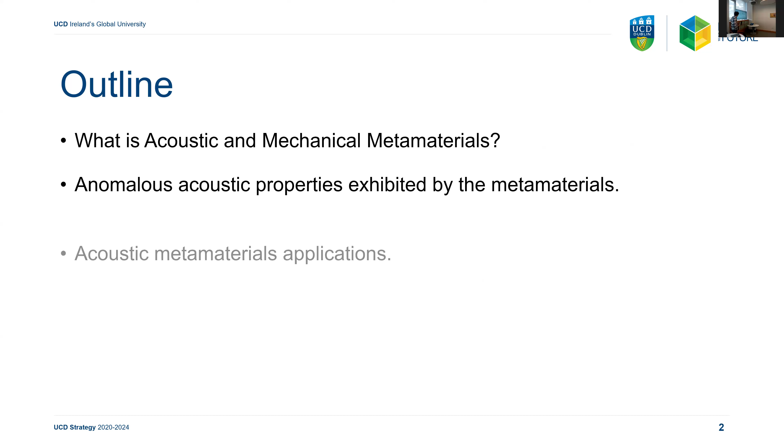I will first talk about what is acoustic metamaterials and mechanical metamaterials very briefly. Then I will tell you more about some of the acoustic and mechanical properties, in less technical terms, that are exhibited by metamaterials. Then acoustic metamaterials applications, mechanical metamaterials, and their application in a wide range of disciplines.

So metamaterials in itself is not a material. These are artificially engineered structures. So we design these structures on a different scale. People in electromagnetic fields are doing it for antenna purposes at nanoscale or micro scale. People in acoustics are doing this at the millimeter scale, micrometer scale, or even meter scale. So in the acoustic metamaterials field, we play with the frequency and the size of the structure. We design these structures in such a way that gives some unusual properties that cannot be observed naturally, that cannot be exhibited by naturally occurring material.

For example, metamaterials give negative permeability and negative permittivity, which is a famous property in the electromagnetic field. According to people working in electrical or electronics departments, it might be a little confusing if you tell them that permittivity and permeability can be a negative number. Generally, it's a positive number.

In acoustics, it can give you negative mass density. It can give you negative bulk modulus. These are some terms which I think you've come across in higher secondary school if you're not from an engineering background. It also gives you a negative Poisson ratio property. Poisson ratio is: if you stretch a material in one direction, in the longitudinal direction, it contracts in the other direction, and this is a natural phenomenon. But if you design your structure in a fascinating way, you can produce a negative Poisson ratio, which means that if you stretch your material in the longitudinal direction, it will expand in the lateral direction. And if you compress it in the longitudinal direction, it will compress in the other direction as well. So these are some unusual properties exhibited by artificially engineered materials. We call them metamaterials.

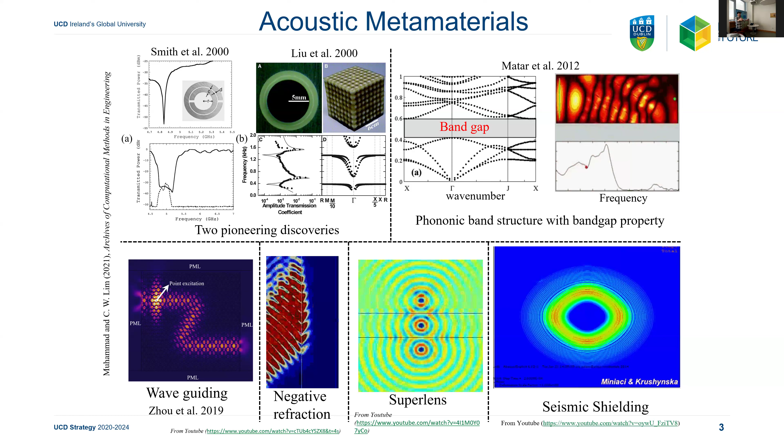My PhD work was on seismic metamaterials. We put structures surrounding the buildings, important infrastructure. When an earthquake comes, it also has hazardous frequency waves. When they interact with these metamaterials, they basically protect the main structure from the earthquake. So you don't disturb the foundation, but you protect your structure, atomic power plant, museums, any big infrastructure.

Now, in terms of noise and vibration, this was one of the active areas that I was pursuing. You can see that noise and vibration is almost everywhere, and this is a serious problem. So in order to solve this problem, we have metamaterials into action, and there are different types of metamaterials based on their different properties.

For example, this is called plate type metamaterials, which is very famous for giving negative mass density property. These are very thin films, thin panels, artificially designed. If you put them on a window or anywhere, they can absorb or attenuate incoming sound waves of very low frequency. For example, if you need a 2 meter or 1 meter thick foam to reduce the noise, that can be replaced with a 2 millimeter or 10 millimeter thick panel to reduce the same noise, but much more effectively. So this is one application.

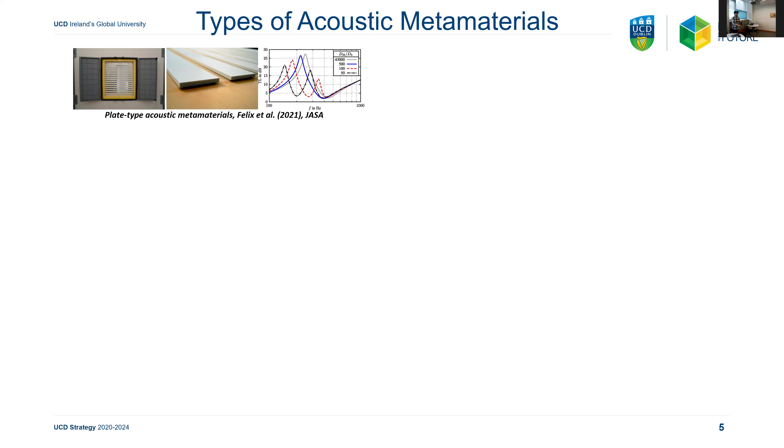The second is membrane type acoustic metamaterials. These are membranes, very similar to our ear drum. We put a mass, and this can be used for different applications, especially in the aerospace industry, to isolate low frequency noise. The size of the structure is very small, and it can cater to very low frequency, or very high wavelength, acoustic waves.

The third is the MPPs, micro perforated panels. These are very small holes which you make on your plate. This is used actively at the moment in the US in aerospace structures to reduce the noise on aeroplane wings. You just make small holes and design those holes, called MPPs, micro perforated panels, and they absorb very low frequency noise. So very good for aerospace application.

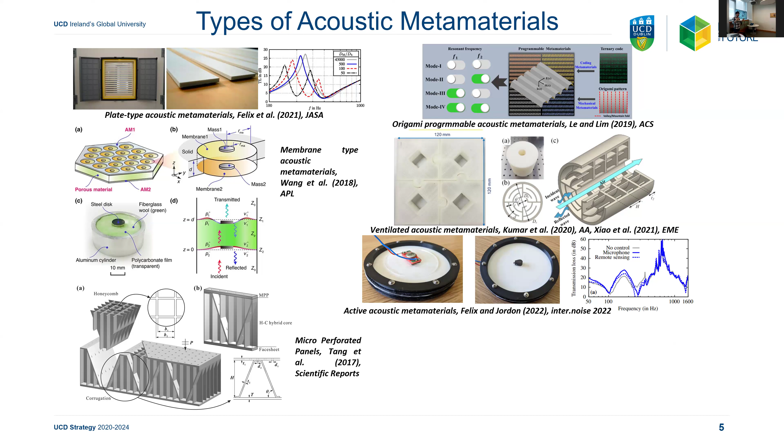This is origami programmable acoustic metamaterials. You can program what frequency it should work at, what frequency it should not work at, to attenuate. And this ventilated acoustic metamaterial is widely used for AC ducts, which give huge amounts of noise in industrial areas. So we put these structures, which are very small and very thin, just beside the ducts, and they reduce that noise.

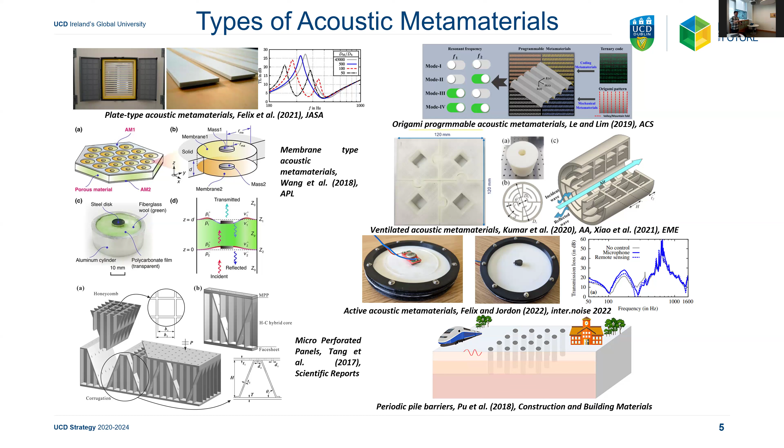And this is the periodic pile barrier. At the moment it's applied in China in one of the projects. We put piles between the railway train and the housing. So those houses which are close to the railway track, we put piles as a barrier. We make piles, and those piles reduce the vibration which is generated by the railway.

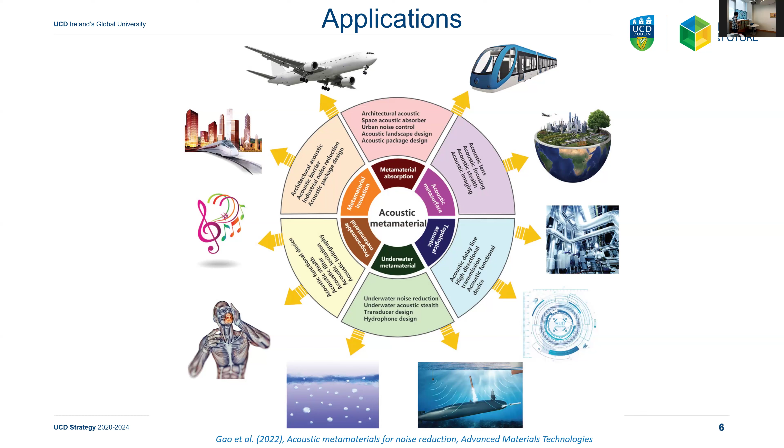Briefly, this application is quite broad, and it can be used for vibration control. It can be used for acoustics. It can have good application in automobile, aerospace, civil engineering. You just name it. Wherever you have a noise and vibration problem in one way or another, it has application because of the frequency band gap property.

Now, generally, when we talk about metamaterials, they are classified based on their dynamic and mechanical properties into 4 streams. Electromagnetic is something people in electrical and electronics might be very much interested in. I'm not working in this area. Chiral metamaterials also come into their domain. What I am interested in is acoustic metamaterials and mechanical metamaterials. Acoustic metamaterials have dynamic, unusual properties, while mechanical metamaterials have unusual kinematic properties, such as negative Poisson ratio effect.

One good example of mechanical metamaterial is ceramic. If you design your structure with ceramic, ceramic is generally a very highly brittle material. If you load the ceramic, it will break. But if you design structure with ceramic based on the principle of metamaterials, ceramic can be converted from brittle to ductile material. So no longer will it break if you apply a compressive load. So this is some unusual property, and those are some of the applications.

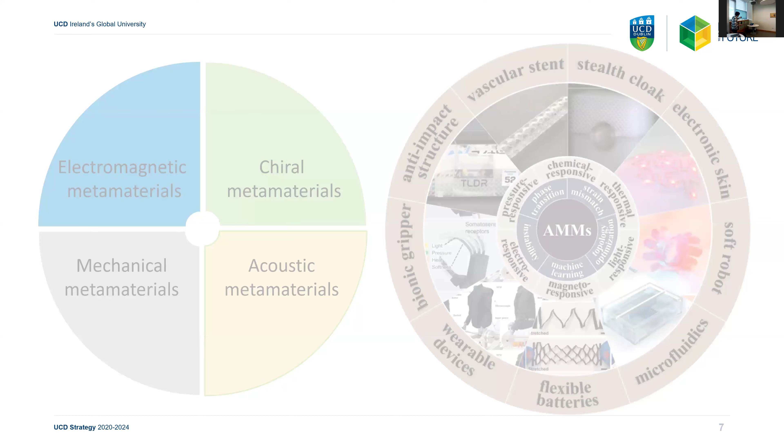So in case of mechanical metamaterials, negative Poisson ratio - Poisson ratio is lateral to longitudinal contraction. It gives negative Poisson ratio effect, where your Poisson ratio nu is much smaller than 0, while your shear modulus is much greater than your bulk modulus. I'm trying to use fewer technical terms, but I cannot explain this in more general terms. There's also negative elastic or near-zero stiffness property. Stiffness is how strong a material is. When I say negative stiffness, it means the material is very soft, very flexible.

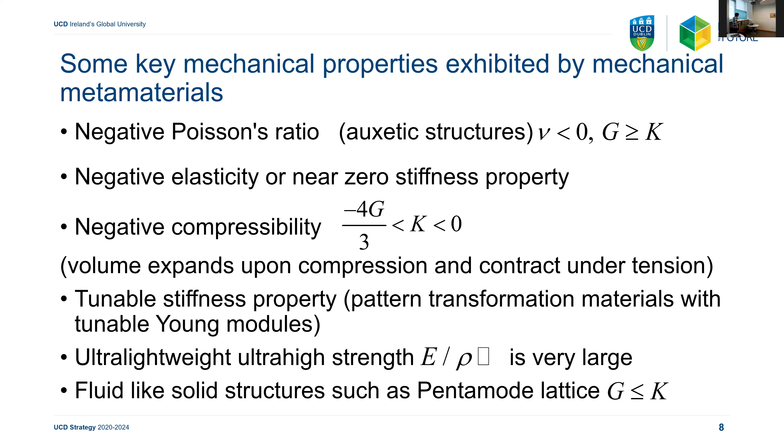Negative compressibility means just like water - so you can make solids which behave like water, but it's not water. It has a very small shear modulus value, and then ultra lightweight and ultra high strength. I think ceramic is a very good example of this. You make your structure, and I will show you in a while, an example that has the Young's modulus divided by density ratio very large. So you optimize this. And this is the fluid-like solid structure, which is a pentamode lattice, which you can see here.

Biomedical is an important field of application for mechanical metamaterials, and it's highly sought. One good example is multifunctional metamaterials that can be used as a nano generator for energy harvesting and active sensing inside the blood. There are quite a number of phenomena going on inside our blood veins, and we can put nano chips to generate sensors that provide information about clots or anything happening in our blood veins. So we can design structures in that way.

A very famous application is in bone implants. When your bone is fractured, for example, the bone plate is generally replaced by conventional aluminum alloy plates. Those plates are solid and very heavy, and sometimes they cause infection. But those structures are now being replaced by metamaterials for the bone implant application. So these are some examples.

The first one is the lightweight, strong metamaterial. If you design this structure, it's irrespective of the material. If you design the structure with ceramic or with polymer, it will give the same mechanical behavior if you plot the load versus deflection curve. So the material itself is not an important thing here.

Design is very important. This one is auxetic mechanical metamaterial, which means if you put a number of this structure together and compress it, it will compress on the other side as well. You stretch it, it will stretch on the other side as well. And that is pentamode - pentamode lattice gives negative or near zero shear modulus.

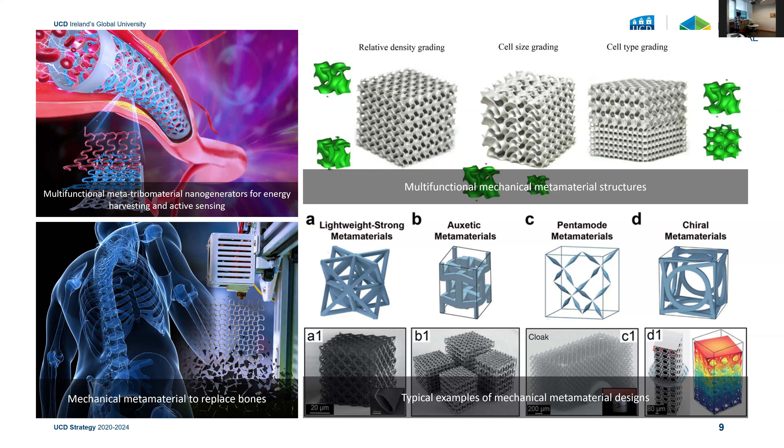Because of the time, I'm conscious of the time, so these are some mechanical applications just to make it more interesting.

This is mechanical metamaterial bone screw for back pain. You put these mechanical metamaterials as a bone screw in between the joints. The good thing is that it has negative Poisson ratio, so when it's compressed, it compresses on the other side as well. It will not bulge out, which is very good compared to the conventional one.

This is a mechanical metamaterial stent. A stent is used especially for heart surgery and for veins if there is blood clotting or anything - they pass the stent into your body to remove it. The stent is initially very thin; when it goes inside your blood vein, it expands to open the vein and remove the clots. The benefit of a metamaterial stent is that if it's expanding in one direction, it's expanding in the other direction as well; if it contracts in one direction, it contracts in the other direction too, giving it an advantage over conventional materials.

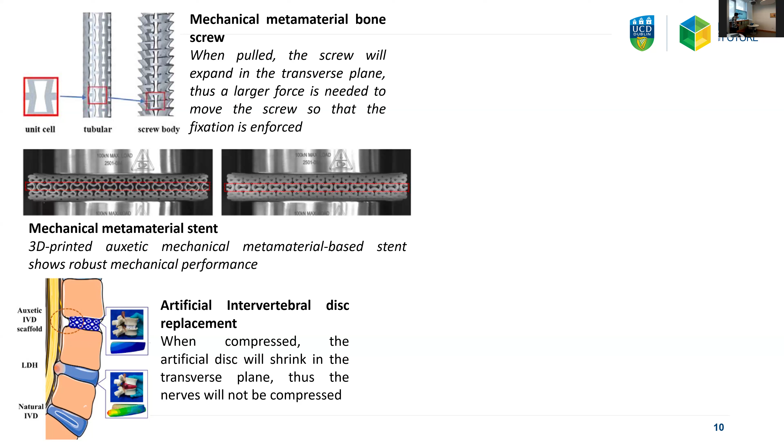And this is the artificial intervertebral disc replacement. You can replace the conventional disc with a metamaterial disc, which we can see here.

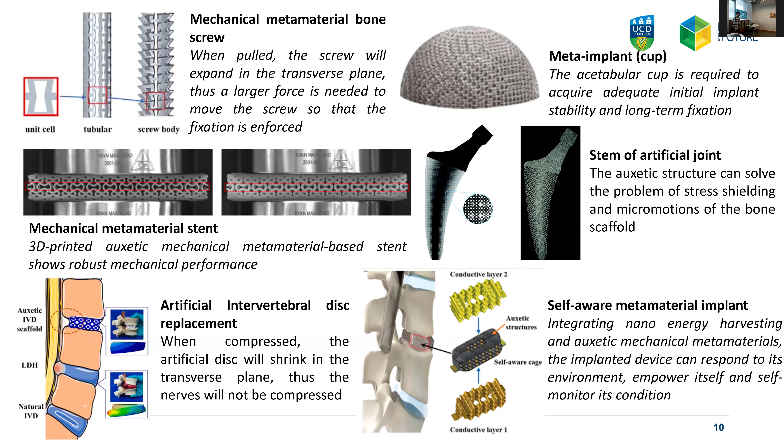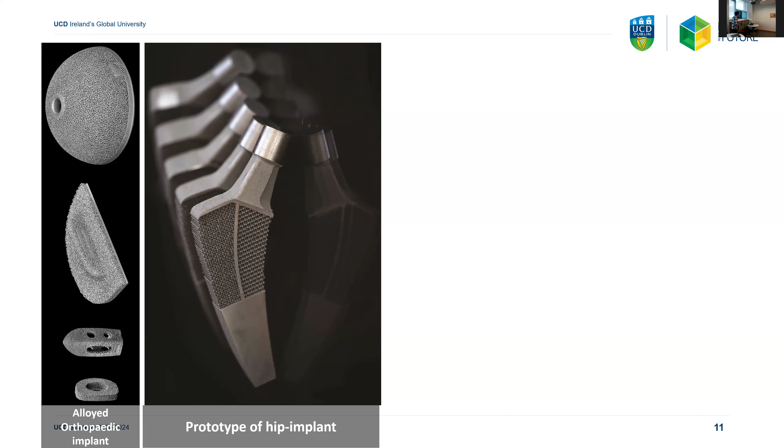And this is the future that we are looking for - we are going to design lightweight but very strong materials, which give very unusual mechanical properties that cannot be achieved from normal materials. For example, we can change the nature, the normal behavior of the material - ceramic and concrete are highly brittle, but we can make them ductile in a way.

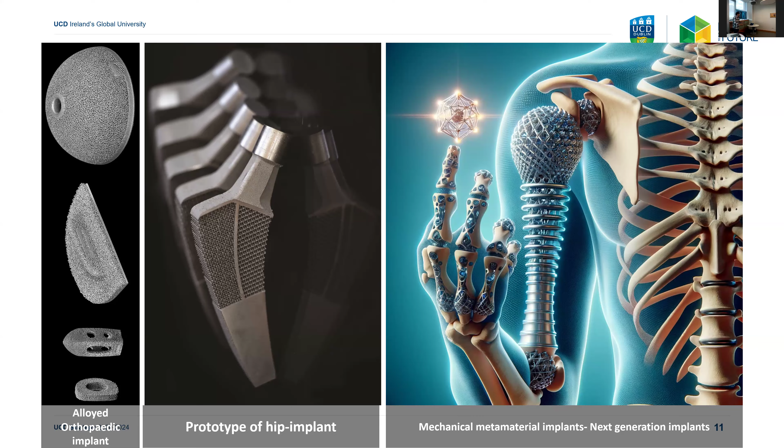Another good application is bone fracture. In normal surgery, you get a normal plaster which you put on your bone in case of injury, but that can be replaced with the metamaterial. You can use this as a bone implant, and even for bigger parts, you can develop this metamaterial that's very lightweight. It also helps in recovery, so you can move your arm and shoulder freely, because with each movement, these unit cell structures configure themselves to give you more comfort.

How much time do I have, Will?

Okay, so these are some potential applications. That was more biomedical, because at the moment mechanical metamaterials is highly sought in biomedical due to its promising applications, but its use is not limited to biomedical. It also has applications in automobile and aerospace industries. For example, lightweight metamaterials - by lightweight I mean it's very light but very strong.

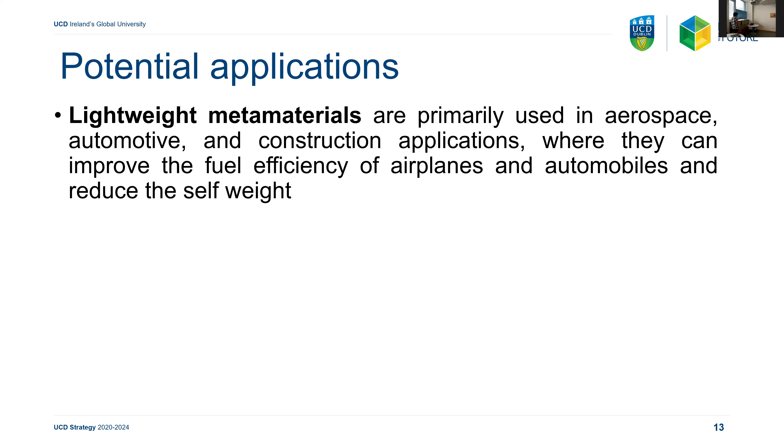If you compare the same material, one with metamaterial design and the other with just a simple design or no design, and put them under the machine, they will give much better performance than the other one. So lightweight metamaterials are primarily used in aerospace, automobile, and construction applications, where they improve fuel efficiency of aeroplanes and automobiles, and reduce self-weight. So you reduce the weight, increase the strength, and that's the challenge.

Pattern transformation - the material transforms its pattern based on the application. For example, for bone recovery you basically make a pattern transformation material, so once you open or close your arm, it will change its pattern. If your bone is broken somewhere, based on that pattern, it will give you comfort.

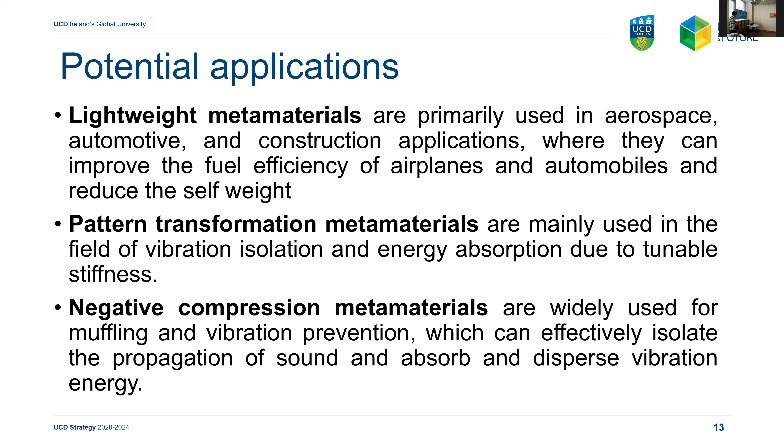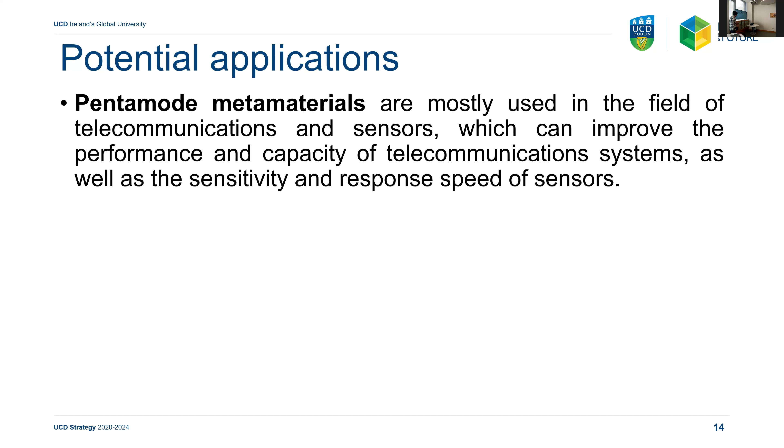This is mainly used in vibration isolation, energy absorption, and the negative compression type is widely used in muffling and vibration prevention, which can also be used for sound insulation. The pentamode type is used in telecommunication and sensors, because it is solid but behaves like a fluid, which can improve performance and capacity of telecommunication systems, as well as the sensitivity and response speed of sensors. That sensor can be used for bridges, humans, aeroplanes, or any application.

And auxeticity is basically the effect where a material gives a negative Poisson ratio, and they have a huge amount of applications. Wherever you want a negative Poisson ratio effect, based on the desirable application, you can design for it - it's not field specific. In biomedical, lightweight metamaterials and auxetic metamaterials are more commonly used in bone implants and vascular stent design, which is very popular at the moment and highly sought after.

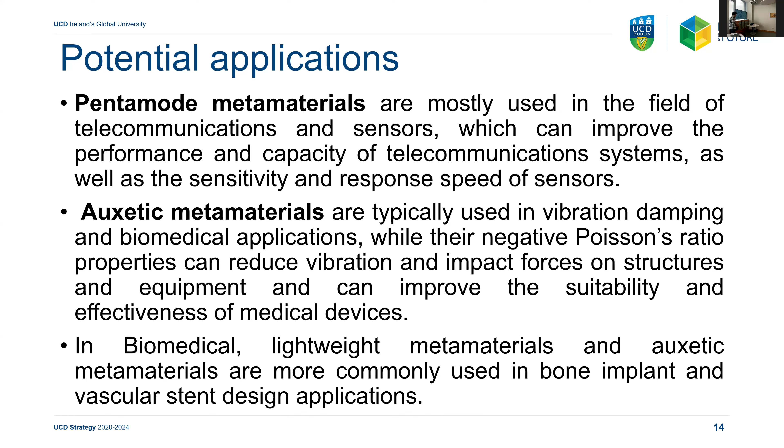Because of time, I'm going to skip these slides, but since I'm already over time, I can answer this in questions.

Now this is an important slide. Usually what we do in mechanical metamaterials - I should have shown this in the acoustic section, but it's more or less the same - it's more about the modeling. We model these structures based on some theories, then simulate them to validate those theories. Then we pass it to the material design part, where we design the material to work based on the theory and simulation. Then we optimize it based on genetic algorithm or topology optimization, machine learning, deep learning, whatever you can call it. Then we pass it to additive manufacturing or laser cutting or other technology to fabricate and test them.

At the moment it is more in TRL1 to TRL4, but now it's moving towards TRL5 and TRL6 as well. If you check the ERC website, you will find that almost every year or twice a year, you'll see ideas on metamaterials being funded. A very good example - if you search Google for UK Metamaterials Network, the UK government itself established the UK Metamaterials Network in 2019, and this network is very established, funding quite a lot of projects on this idea because of its potential.

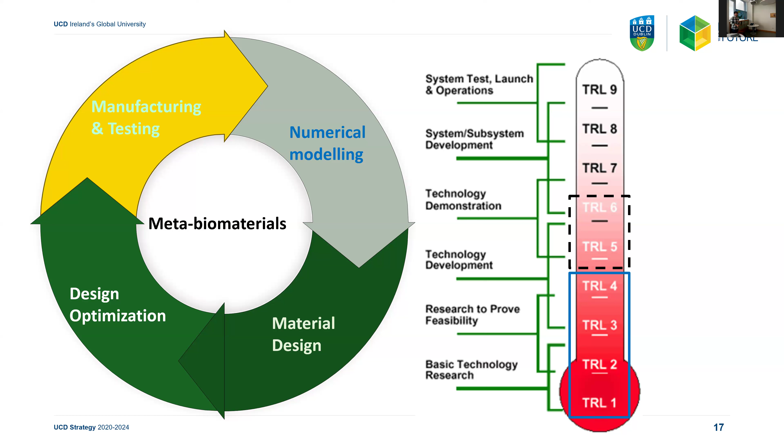So metamaterials is really not a specific field idea or topic - it's very multidisciplinary. We have people from physics, material science, mathematics, engineering, and it's open for more exploration. I'll stop here, and if there are any questions, I'm happy to take them. Thank you.